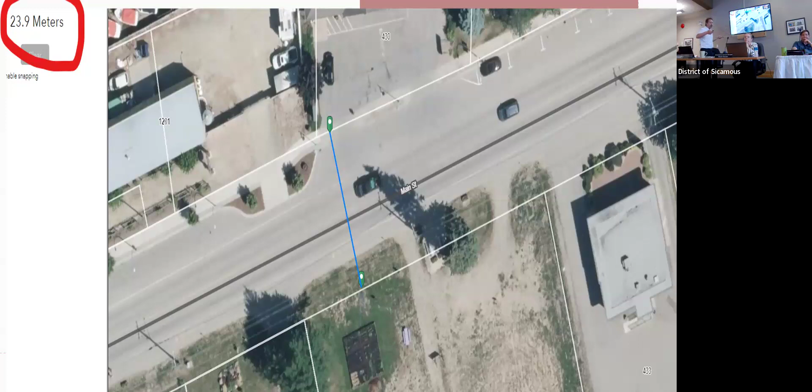If we take a section from the top of 425 Main, we're basically dealing with a 24-meter road right of way. So 12 meters from the center line to the property line is kind of what we have to work with. As you can see, there's a significant buffer there. There's a water line on this side as well, which we'll get into - that's a scheduled project that needs to happen in the next little while. So there's a few moving parts, but we can go through this, and if you guys have any questions, we'll try and answer as best we can.

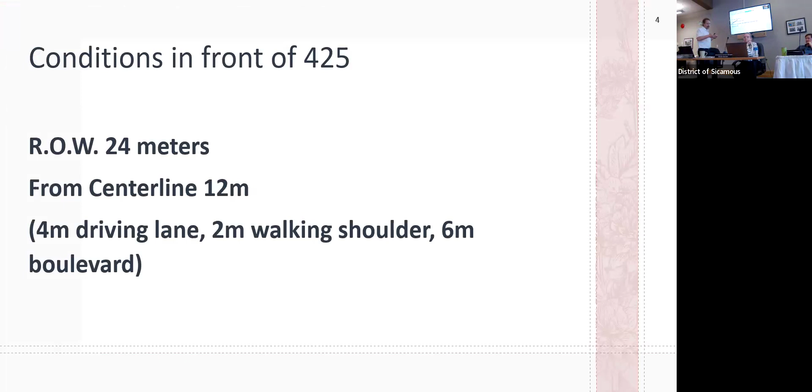So the right of way is 24 meters, 12 to the center line. That would allow a 4-meter driving lane, a 2-meter sidewalk, and essentially 6 meters as a shoulder or a buffer. In our subdivision servicing bylaw now, the cross section shows just back of the asphalt an unspecified amount of space, but it just says variable. So they blocked off a good amount of space, and primarily we've been using that for snow clearing - that's where we pile the snow on the south side. So this project would impact this big area.

Keeping in mind, on the north side of Main Street, we have sidewalk already existing. The snow all comes to this side. So it's getting trickier - as we develop, it gets a little trickier.

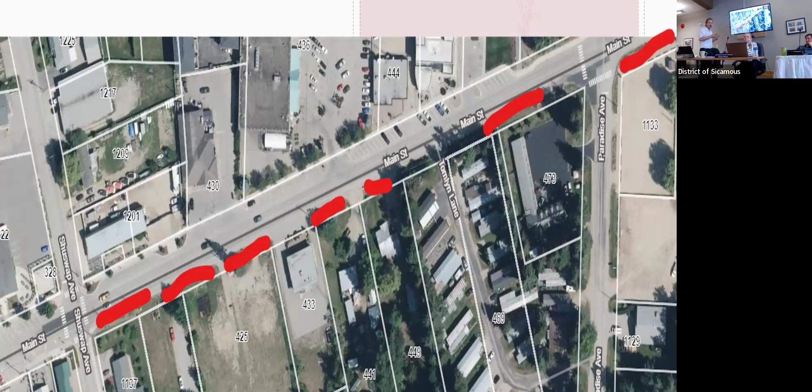We could do some parking, some angle, and just kind of work around the street lights and work with the developers so that there's a provision for snow. Or we could eliminate the snow removal and continue to make it tougher. We would have to look at getting equipment sooner than later though, that would have to move the snow instead of just casting it to the side. So I think there's a balance that could be struck here with some angle parking.

So a few years ago, we identified Main Street as a project we wanted to do for the frontage. We knew 425 would kind of be the impetus for that project to get rolling. We didn't know what was coming, what would be needed. But we did go out and we got some prices on what it would take to upgrade the frontage on the south side of Main Street.

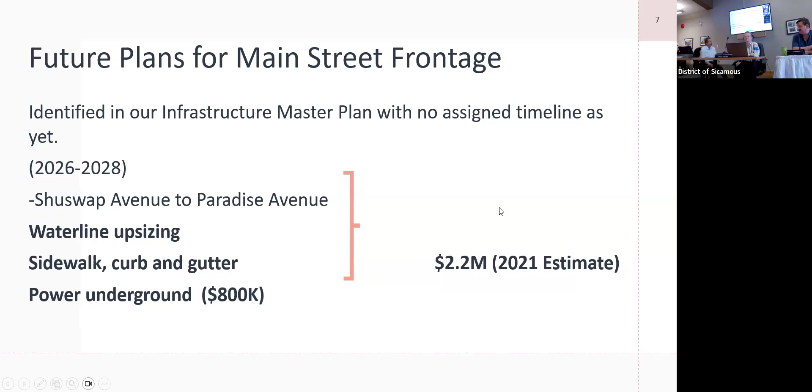The other thing with underground power is, I get what you're saying, that it's never cheaper now. I just don't know if it's actually necessary in this respect for that to actually be built out properly. I don't want to spend any extra money until we have some sense around what we're going to be doing for water treatment upgrades and some of these other really large projects we know we have to do. This is kind of a nice to have, not a must have, but we have some must haves coming.

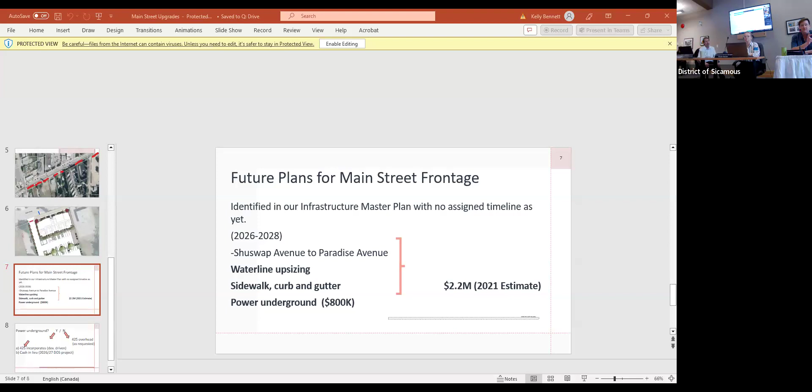And I think if the developer is happy with the overhead lines and we can work with that, as we get a better idea, once this 425 Main Street piece is in there, it probably will spur other development interests along the path, and then we'll see how those other lots develop, because I think it will have that impetus.

Then that's probably the time we could be looking at a larger plan, in terms of taking the whole Main Street and doing it all at once. That would be incredibly disruptive right across the board, trying to put those power lines underneath. It'd have to be done at a certain time of year too, because I think a lot of people would be worried if you were doing it in July and August. It's a big project.

So in terms of us trying to get 425 going and everything rolling, I think leaving the overhead lines — I mean, obviously everybody would love to have them vanish and not be there, but in terms of practicality, I'd say leave it. Then we'll see how 425 spurs the development along the way, and try to figure out this next big piece with the water treatment plant, what we have to do and all the money around that, and then see what we have for more discretionary types of projects.

That's my opinion. Thanks, Councillor Bailey.

Kelly: Yeah, just for some quick clarity and background on this underground power and why we're here to get council's direction. Historically, from 2020 to 2022, we had underground power in our DCC bylaw for Riverside as well as for Main Street. So we always had that incorporated, that when we develop those areas, we're going to do underground power.

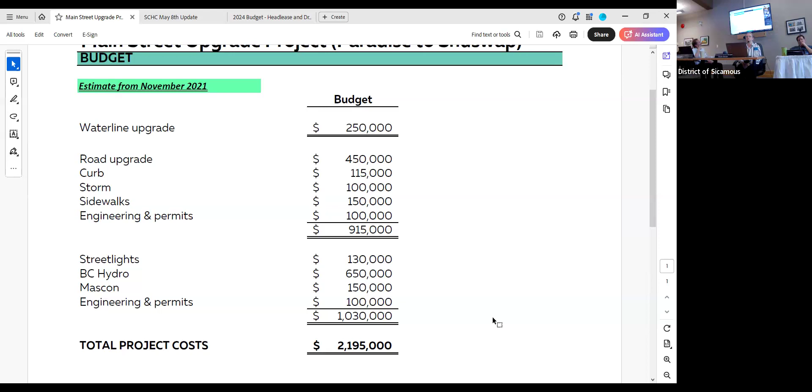Through the chair, thanks Daryl. Lots of really great information and learning lots about parking, underground, and costs.

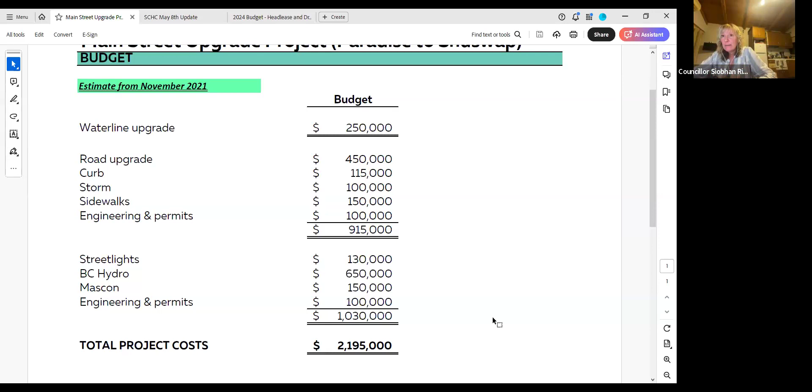I think it would be incredible to have everything underground. But I think we need to finish some of the projects we have going, and we've got a lot of big, expensive things happening and coming up that are very important to this town. So in my opinion, this would be absolutely wonderful, but maybe not something we should be taking on.

And on the housing committee, as Gord said, I would be very concerned. Our developer was looking at costs between 2 and 3 bedrooms, 1 and 2 bedrooms, and how his rentals were going to go with that, garages and all that stuff. And I would be very concerned if we go back to him and say we have all our timelines set in. These guys are super excited.

We're pretty set to go on this one. And if we say, hey, could you cough up 900,000? I can see that being a deal breaker, and housing is very, very important in this town. We absolutely need it. So again, I think the underground would be wonderful, but I just don't think this is the time.

Thanks, Councillor Rich. Councillor Beach. Through the chair, I agree with the concept that it's wonderful that we're looking forward to putting it underground. Ultimately that's what we want, but I would be concerned about the additional cost for the development and the delay at this time, when we really need the project to move ahead as quickly as possible.

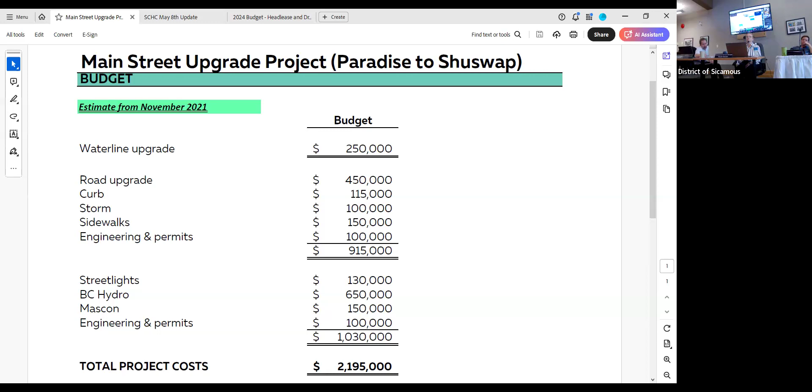Thanks, Councillor Bushel. That was going to be my question too — can we prepare for it for the future? We don't need to do it now, but how much prep can we do with our own project, and tie it all in to run it in later? I'll get back to you on that.

Councillor Evans, thank you through the chair. Just a comment — the neighborhood across the tracks, those mobile home parks, have TELUS Optic up right now, but it's not available on this side yet. So TELUS wants to expand. They even phoned me the other day and asked if I want it, then said, 'What's your address, sir?' I told them, sorry, we can't give it to you, because I know they're making plans. So I'm just curious about when they're planning on that.

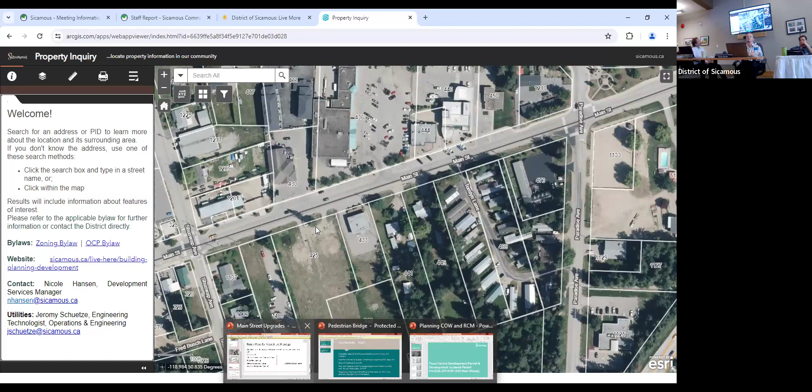So, and the second part is — go ahead, Nicole. Thank you, through the chair. I was just going to add, some changes are going to have to occur in front of 425. Because the building is so tall, I understand there are some poles existing in front of it, and that's quite awkward — probably being dramatic, but you could reach out and touch the pole. So that's going to be a safety issue. Something's going to have to change, no matter what the decision is, going underground or staying above.

Through the chair, go ahead. And I guess I could have included that — that would be incorporated into any buffer spots we were talking about, which we could consider as well. That would be a cost of moving them if they're working in around that space. Yeah, I'd be working around them, having a buffer around them, and a parking offset.

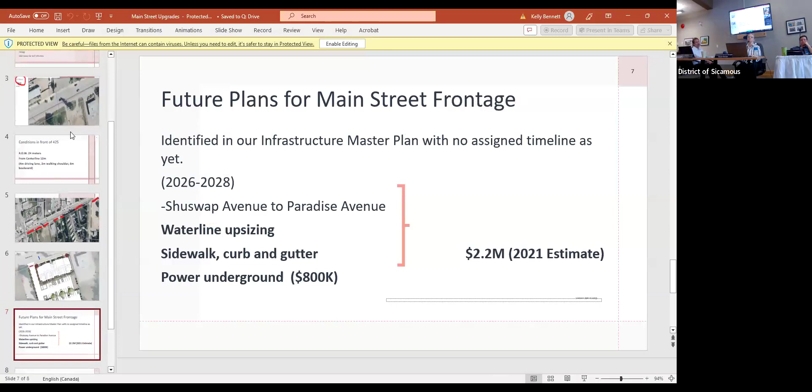Okay, and the other question you had, Daryl, was about parking — like if we wanted parking in front of that building. So my question is, if we have commercial space, 1,700 or so square feet at the bottom of that building, depending on what it is, should we not have some parking there for sure? Definitely we should. But on the other hand, perhaps it's a coffee and sandwich shop — should there not be some little tables sitting outside? Is there space for that as well? So I guess it depends on what's going to go into the commercial space before we can lock it in. Yeah, with the patios and tables, that'll be more addressed with the setback of the buildings. Okay, so I know that's coming up today as well.

Okay, Councillor McCabe. Yeah, for the parking question, I think angle parking would probably be the way to go, in my opinion. We're lucky that Main Street used to be the Old Trans-Canada Highway — we got that width down Main Street that a lot of other communities don't have, so we have the luxury of that. I think we could use it for parking and still have the patio stuff, like you say.

My opinion would be angle parking in the front there, not parallel parking.

Councillor Bailey: about the angle parking, just to stay consistent, although we do have some parallel on the other side as well. But in terms of the lot lines, I think they wanted like a zero lot line. Is that correct?

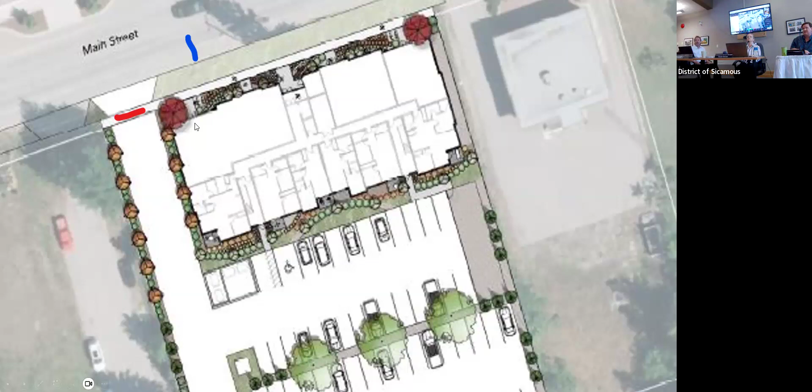Planning will be talking about setbacks here shortly.

Whatever they do in front, whoever leases that will have to determine it, because some people will probably want it and others won't. They might want to put a bike rack there or something. But I think as long as we have that parking there to service those commercial units, that's our job, and the rest is up to whoever wants to run a business there.

Just a follow-up on the poles - would we have to move some of them? Maybe move them away from the building, or have we just not done the analysis yet based on the design and architectural drawings?

Through the chair, we haven't done the analysis. I've spoken with their engineer, and maybe it's a little preliminary, but he seemed to think they were okay where they were. Zach will probably speak later - the applicant's on the line if there are questions. I'm happy to answer any questions if there are any.

My question to you, since you're probably looking at this issue, is with the telephone and hydro poles and how you have the building developed - how big of an issue is this for you, or for us? Obviously we're in this together to make this work.

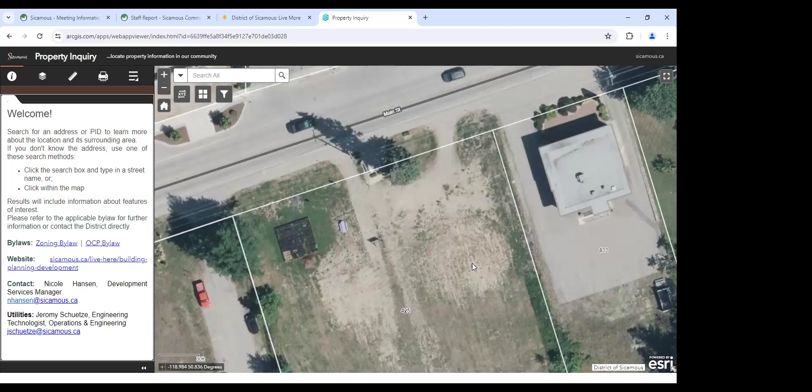That's my understanding at the moment. We haven't had a designer assigned to the file yet, so we just had a preliminary meeting, and the gentleman on the call told us they would be okay where they are, but we don't have an approved design completed yet.

No, but that's as good as it gets really when it comes to BC Hydro at this stage. Yeah. Any other questions?

Kelly: I don't have a question, I just wanted to summarize the discussion. So what I'm hearing is there's an appetite to not include hydro underground right now.

Correct, but to look at getting it as close to hookup as possible, and also the angled parking in the front. Is there anything else you need clarity on, Daryl? No, I think that's pretty clear. The angled parking in the front would maximize what we can do in that frontage.

I guess I kind of sold it in the beginning - I was hoping to strike a bit of a balance between a buffer and some parking. The existing power pole would be a perfect example where we might want a bit of a buffer on both sides so we can maintain some snow storage, but still keep sufficient parking for the commercial.

So a little bit of both, and we could get it back for you to look at some point. Mind you, the amount of snow we've been having, I don't know how worried you need to be about that - hopefully we have more. But even if we do, I'm pretty sure we can figure out how to get some snow off Main Street.

Councillor Bailey asks if a motion is needed, noting they're discussing something fundamental: taking out the underground parking and underground hydro as part of the DCC calculation. It's confirmed that it's already out, as a variance to the subdivision servicing bylaw which will come forward to council.

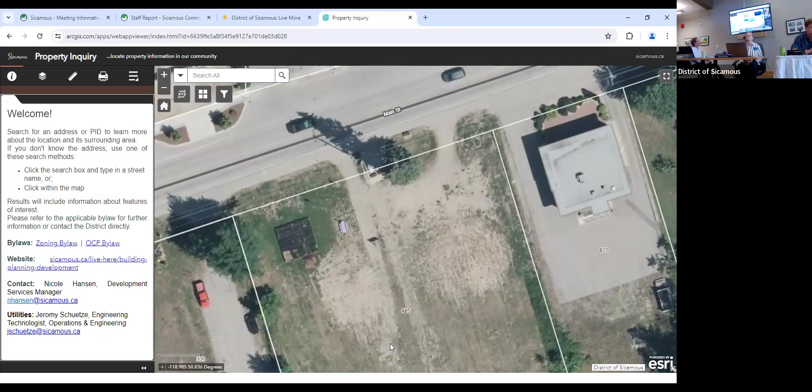We're going to move on to 425 Main Street Development Permit and Development Variance Permit. Nicole and June are going to take this one. It's more just discussion points. The planning team has collected comments from the developer and the different business units here at the district, and we have a few points to chat about.

Maybe I should talk about that drawing. It's just a really cool visual, I guess the proposal superimposed over the lot showing what it could look like.

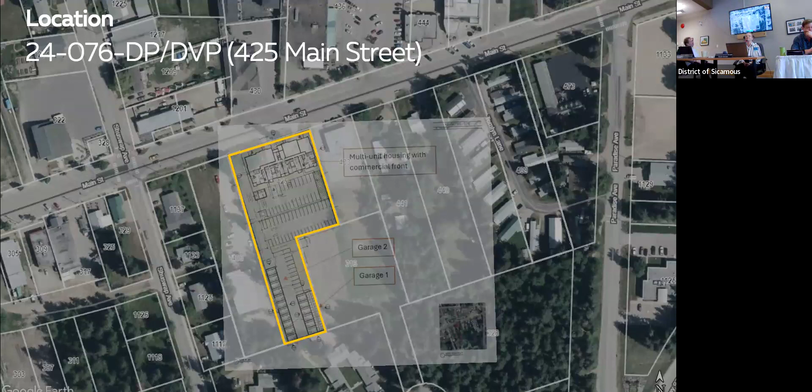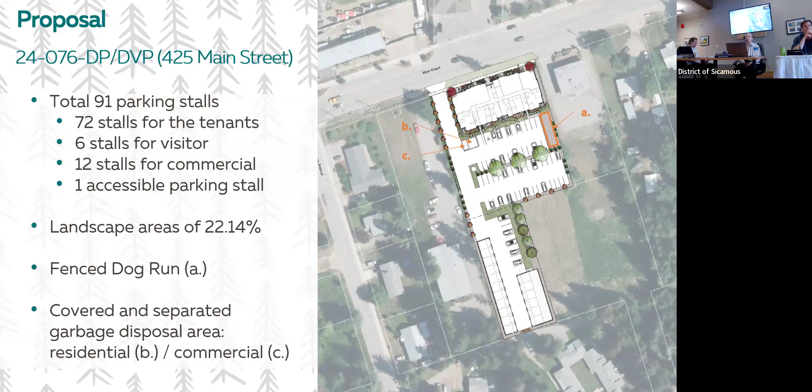Discussion points for today: we'll go through each one, starting with the position of the main building—the big front one with commercial on the bottom and housing on top. Then the potential pedestrian walkway we've been discussing, and access for fire and emergency services.

For the position of the main building, there are a few things it might affect or interact with. One is atmosphere—we already talked about how tall the building is and how visible it will be on Main Street, so atmosphere and the shadow it might cast. We have building massing requirements in our zoning bylaws, we'll talk about that, and the road infrastructure Daryl mentioned earlier, and for fire and emergency services, where that would come into play.

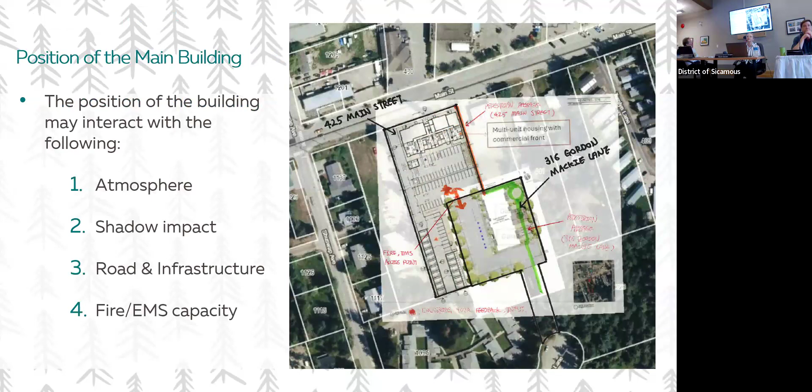Atmosphere and shadow impact: the building is shown in orange there, Jude threw that in for us as a visual. It might interact with the community atmosphere, casting some type of shadow or a longer duration of shadow over the road and potentially properties around it.

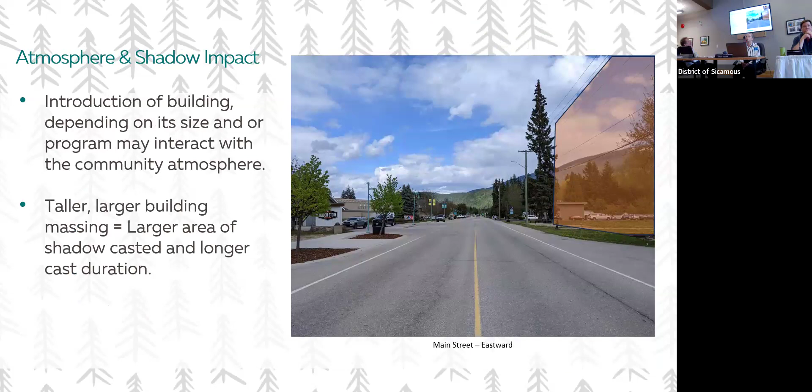In our building massing zoning bylaw, I don't know about the front setback and what the casting might be, but on the east side of the building, if you do the calculations, we're looking at a 9-meter setback for building massing and shadow casting. That's quite significant, so one of the requests in the development variance permit is to vary that 9 meters down to something more typical of developments—I can't remember the exact number offhand, maybe 1.2. So that's another talking point for the position of the building: do we want it set back further from the road, more to the west? We'll talk about that more.

The pedestrian walkway could be established in a number of different ways: an easement between 425 and the seniors housing, or a statutory right of way owned by the District of Sicamous, which would make it our responsibility and liability.

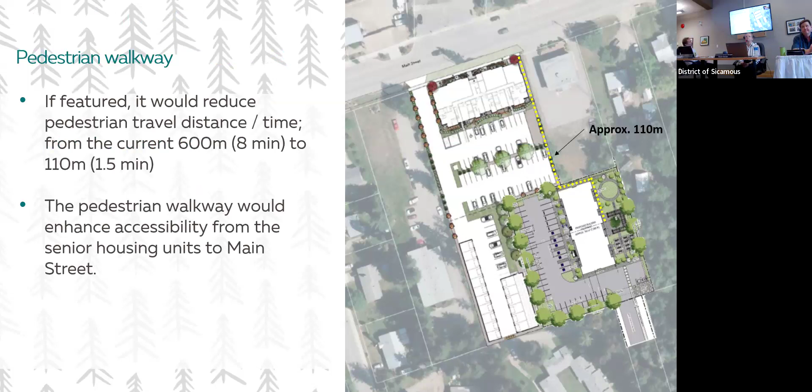Okay, and last, access for fire. There's also discussion about potentially having a connection between 425 Main and the seniors housing, shown in the red area there. It would take away some of the parking stalls proposed by 425.

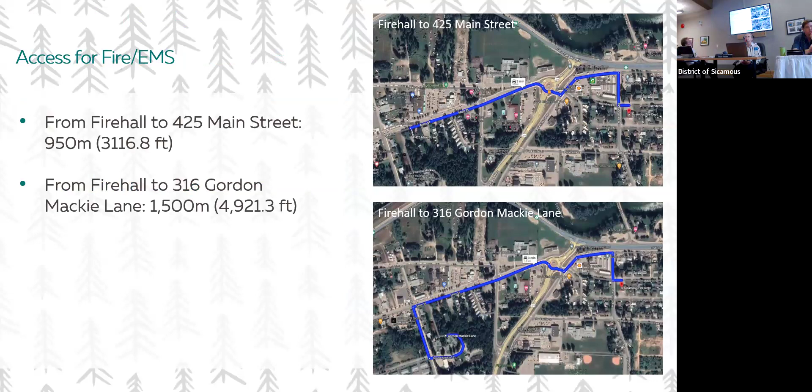This is showing the fire hall response time. To 425 Main Street it's 950 meters, and if we had a connection from the fire hall to Gordon Mackie Lane, that's 1.5 K. If you went through 425 Main into the seniors housing, then you're at 1.1 K, so it cuts it off.

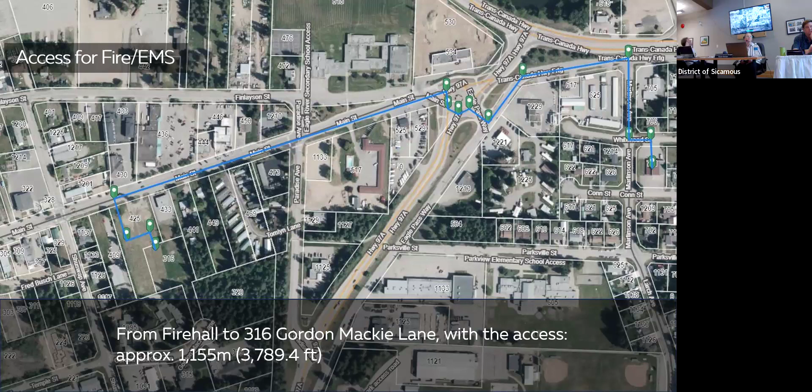After we have this chat about those three points, we have to propose the development permit. Then we'll fine tune the variance permit and send out a notification package to impacted landowners. Later tonight we're also going to be talking about the proposed rezoning for the entire property, but that's not something we're discussing right now. That was the last slide.

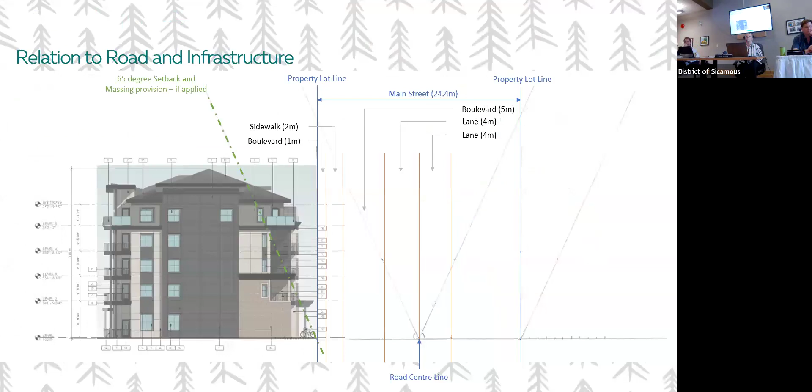Kelly, go ahead. Yeah, thank you. This is also before council today. This is a really big project, highly visible, really important to the District of Sicamous, and we're part of it.

At the Planning and Development Committee we did talk about pedestrian access, and when we talked to Zach and Jim about it, there was hesitancy to have that walkway, worried about liability as well as other concerns on their end. With the emergency access, as this is something new we hadn't discussed previously with them, there were also worries about liability and the removal of some parking stalls.

We have the fire chief here today in case there are any questions. We had a meeting internally about that emergency access, and if these were being built, if one was already there and we did the other one, we wouldn't require it. As they're both being built at the same time, it would be advantageous.

So it's recommended to have that there, but it's not a requirement, correct? Pretty much summing it up, it's not a code requirement. It would improve safety and access a bit more, but it's not required. So this is where, and I know the applicant's online as well, we just wanted to have a discussion with council today to see where you're at as we handle this project through.

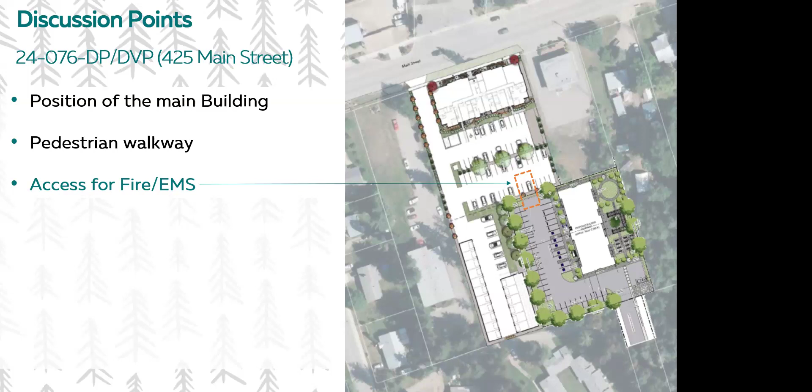Not even a problem. Zach, do you want to make a comment on the moving of the building and the right of way? Yeah, we'll have to look at it with the architect in terms of positioning the building. There are sort of code requirements involved there as well, so we have to get our code consultant involved in terms of if it's a right of way or a dedication. I think if it's a dedication, there's implications on our code requirements for glazing and fire requirements and things like that, but a statutory right of way could be possible. So I think it's something we could take offline and study, and come to a solution.

Thank you. And I think from Kelly, what are you looking for from us right now? I think the appetite for council is not too concerned about taking out parking spaces, and just the rejigging to see if that works.

Yep, and so because this is time sensitive and we want to get the development permit to council on the 22nd, followed up by some variances - there will be some massing and side setback variances, of which the neighbors will be notified - we just wanted to have a discussion on the position of the building, the pedestrian walkway, which I think we've all talked about, and the emergency access. I think everybody feels like it would be ideal, but maybe not on this project. We'll look at a statutory right of way for the pedestrian walkway, and maybe we can shift the building slightly, a little over and a little back. Potentially we'll work with the developer to see if that's feasible.

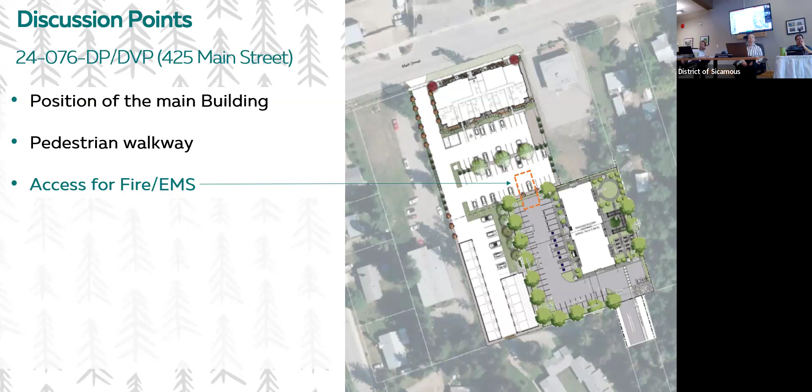Yep, and we'll bring this forward. Everybody good? Good. Does the developer have anything else they want to comment on or get clarity on while we're all here in a lovely meeting? No, I'm happy, and no further questions from our end. Perfect, thank you guys very much for being here today. Yes, thank you. Thank you, Nicole, June.

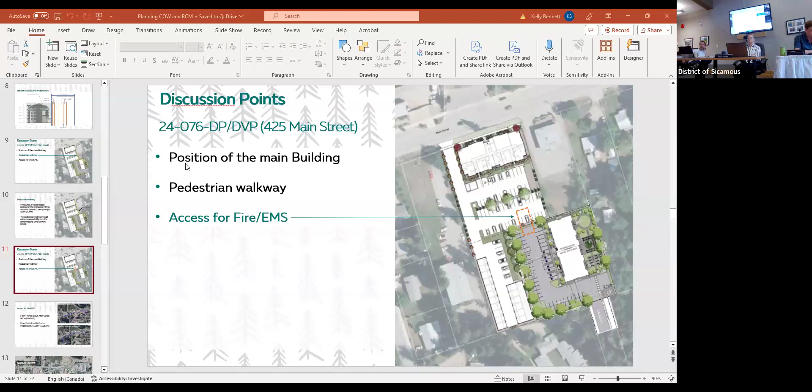Okay, we're going to get a healing center construction update. Kelly, take it away - we're getting close to 3 o'clock. This will be a really brief meeting.

This is for the month of April. We received the progress update, so we'll look back on April - we basically completed all of our tie-ins. Congratulations, that's done. Looking ahead, it's all about footings, foundations, forming and backfilling, so that's what we'll be doing. You'll see, I believe they're pouring the footings next week, the walls.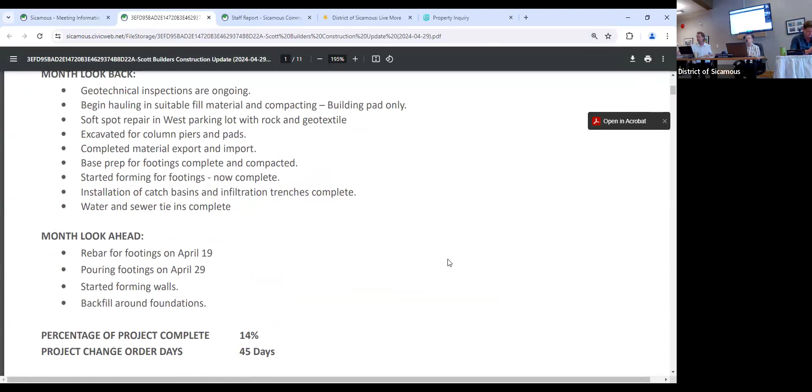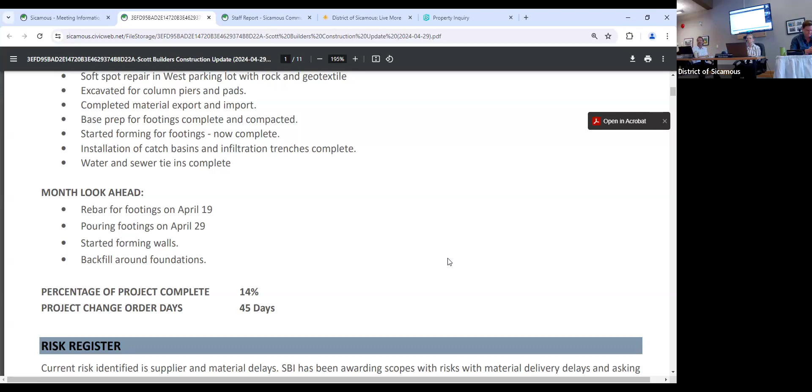Everything is moving along nicely with the projects. We've had 2 change orders approved. One was for various soft spots that they found, which was almost $70,000 - I believe a $74,000 change order for the additional digging that was required.

And a $4,000 one to make sure that the trusses and joists can bear some future solar panels, which we're not doing the solar panels now. So there are some change orders up, but we'll have some change orders down, and we do have that couple hundred thousand dollar winter allowance.

Good news is I'm working with the builder on finalizing the interior contract. So I've let them know that we are awarding it to them, and we're fine tuning the contract to try to trim and make it as beneficial for the District of Sicamous as possible.

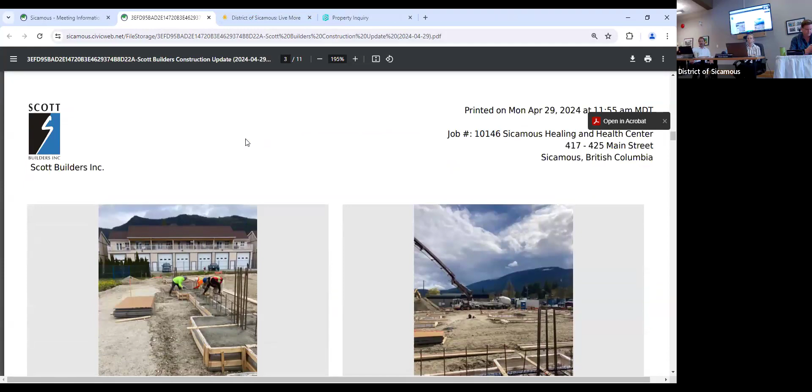This update will be in front of council every month, so I will let council know if that changes, but right now I'm assuming it will be - you never know, these guys are seasoned pros and they're out there with their team moving everything along. And yes, the 17th was already talked about, so we'll regroup on that. Our next meeting is May 16th with the builders.

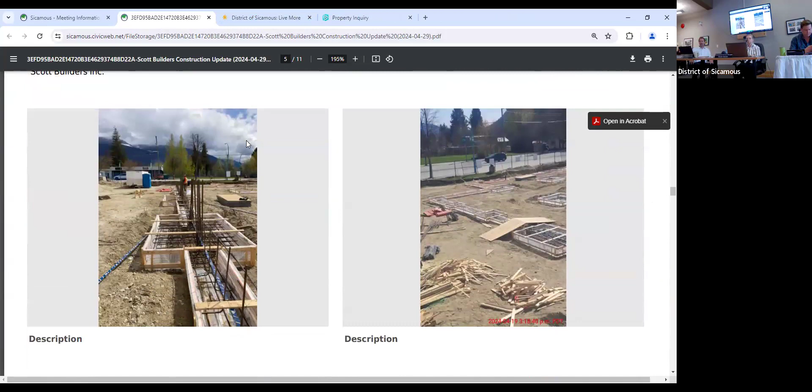Here's some pictures of all the goodies they're working on. And on site there's no safety issues, minimal risks right now, and just potential material delays, but we're looking good.

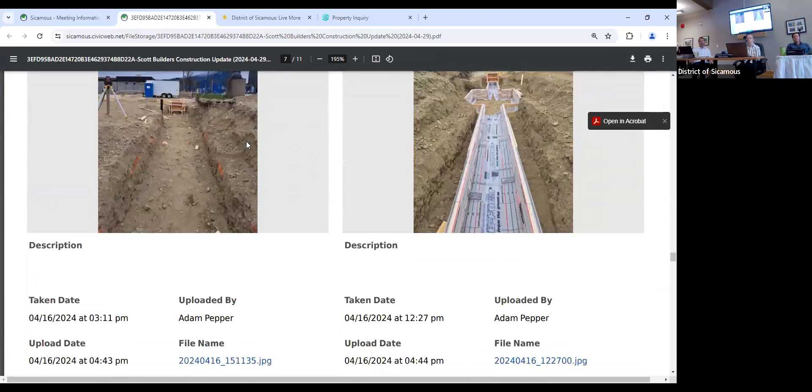Perfect. Thank you so much, Kelly. That is awesome news. Any questions or comments from council?

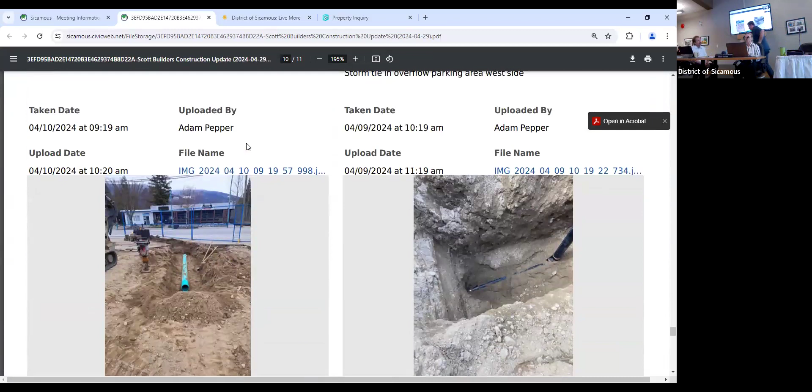Councillor McCabe: Yeah, great job, it's gonna be a great asset to Main Street again. And I don't want to be negative, but what kind of potential delays do we see because of the change in material supply, because of the structural difference for the solar panels?

Through the chair, that's a great question, and we're not gonna see any because what they're doing now is changing the order and they're gonna start doing some of the interior stuff. Because we've awarded the interior, they're just changing the timing of when they're doing it, so it's not gonna have any delays.

Great answer overall, perfect, yes, awesome, good job Kelly. Councillor Beach: yeah, it's very, very exciting. That's a good question - coming both ways from the solar, awesome, good, excited. Councillor Evans: kudos, yep, perfect, beauty, good job, good job guys.

We have a very, very long list now that we're thinking of 8 months of being in there, in terms of what needs to be taken down, equipment and security and just stuff, but that's not your problem, that's our problem. Yep, that is, but thank you very much. Gord, Siobhan, you guys are good?